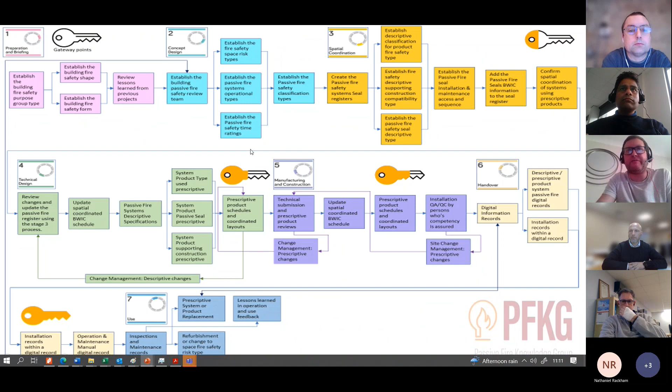BIM being the key part of getting the asset stuff correct in relation to how this flow works. So don't pay too much attention to it - it's all about how you establish the shape and form of the building, how systems work in risk categories in relation to space, ratings, time, how they operate, and how you get to the point where you've got a register of all the different seal types in the building.

Sorry, Paul, just to jump in there, just for my knowledge, when you refer to the passive fire systems, so these are essentially things which don't have power or anything to them. These are just sort of fire stops and seals and things like that. Yeah, I'll get onto it because there's active systems which are a bit more dynamic. You've got static passive fire, but then also you've got transient systems, right?

So we broke it into 3 categories. You'll see it in a minute when I go through it all. But this covers all of it. So passive fire knowledge, because even if you take a fire door, it's still a passive system, but you can walk through it. So it's transient. Smoke extract is like dynamic, but it's passive in its first principle because it compartments, but it can open to extract. So we looked at it in a slightly different way to bring it into language, make it easier.

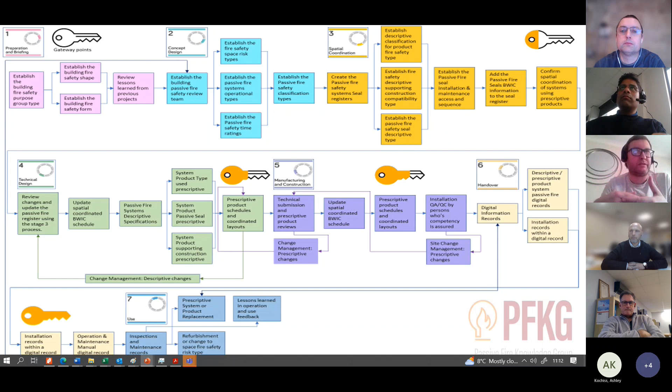So we kind of went for, don't worry too much about all this at the moment, because I think in time we'll get this issued out for a bit more, but there's a RACI that sits behind this as well. So when you talk about getting clients to understand who should do what, we're trying to tackle it as well, but at a very high level rather than going into the detail. So the biggest thing was breaking down.

The next part of it was when you take, whether it's a fire door, a damper, whether it's a pipe seal, because these things are all different, whether it's a flue, a busbar, the only way to understand how these things work in practice is to look at the fire risk type of the building, the space risk. And whether those systems are, as I said earlier, a fire door is transient because you can walk through it. And they can be dual swing, single swing, and they can have glass panels in them, whatever. All different sized doors.

Fire dampers are generally static. They shut. Smoke control is dynamic because it can open to extract. So we try to bring it into some different language about the operational types. Once you know that, you've got to assign that to that. Then you've got to look at how you get to the classification of those products, because this classification here is for a fire damper. But there's other classification information or important information that sits behind it.

Hence why the BIM's so important, because then you've got the supporting construction side of it, which we all know has been half the battle, whether it's symmetrical, asymmetrical, or it's rigid, whatever type of wall construction has been used, whether it's standard or other. So this side of it, then you've also got the installation and maintenance type. Unless you consider all of those parts before you get to this point here in gateway one, there's a good chance that build or something's going to be wrong.

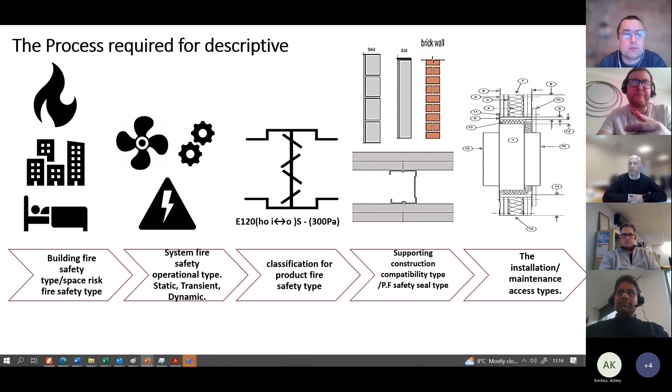So I think, as you said earlier yourself, it's about how we get clients back to a very diagrammatic view where you can say, if you don't follow something like this, this is what the output is going to be to your project. So one of the things we said previously externally is that fire engineers generally, don't get me wrong, don't shoot me down, should know the space risk and really should know the building type. And that should be the fire strategies. They're really the knowledge holders of that part. Especially the space risk, they should be the knowledge holders.

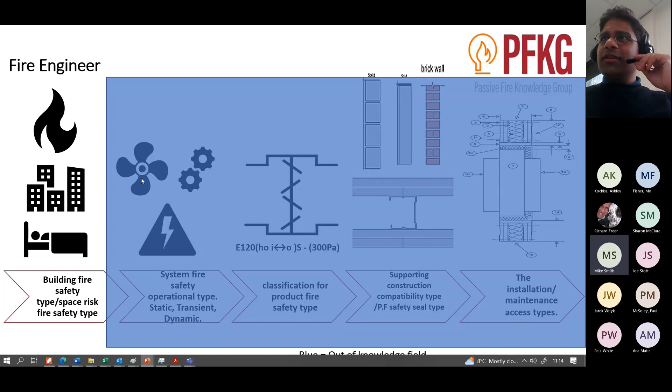Is everyone else? I'm just struggling to hear a little bit. Should we turn our videos off just in case, if that's okay? No, I don't think it's you, Paul. It might just be a bandwidth issue. So I'll turn my video off. Maybe if everyone does that, just to see if that works. Anna. Hi everyone. Apologies for being slightly late. That's fine. Paul's just doing a presentation on the work they've been doing. We're just going to turn cameras off to reduce bandwidth, if that's okay. Yeah. Thank you. Try that, Paul. See if that works. Rowan, can everyone go on mute, please?

Start speaking, Paul. See if that works. Can you hear me now? Yeah, that's good. Perfect. So I think it's just my lead. You can still hear me, yeah? I can, yeah. Perfect.

So just for Anna's benefit, externally it's called the Passive Fire Knowledge Group. I've been looking after the process. Just really quickly for you, Anna, we try to get RIBA aligned in such a way where you've got some very big methods of going through passive fire knowledge cradle to grave. So we were just talking about shape and form of building, the risk category of space, your system operational types, and how you get to the point where you really need to have a classification register before you get to Gateway One, because otherwise you can't tell whether things are going to fit in the building. And there's a case example at the back of this about

what the effect of not doing it is. If I just move forward quickly back to where we were, these are the five things we were looking at: building safety type, space risk type, the operational side of the system, because fire doors are transient, dampers are static, smoke control's dynamic, same as sprinklers because they're performing a function. Every product's got different classifications by DoPs, but there's other information that sits behind this. To get these parts right, you need to understand the blade type of the damper and other things. And you've also got wall types, which is your standard supporting, your flexibles and your brick and your block, or your non-standard, your asymmetricals.

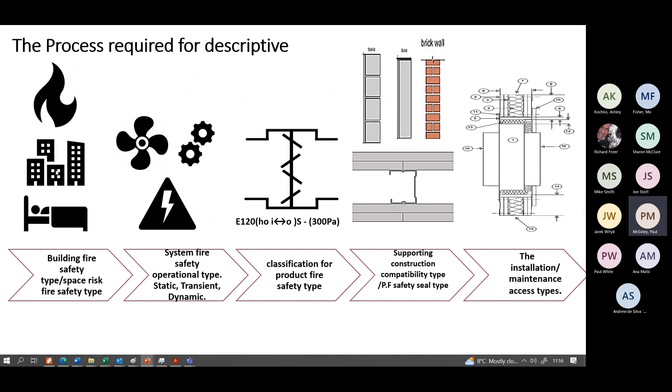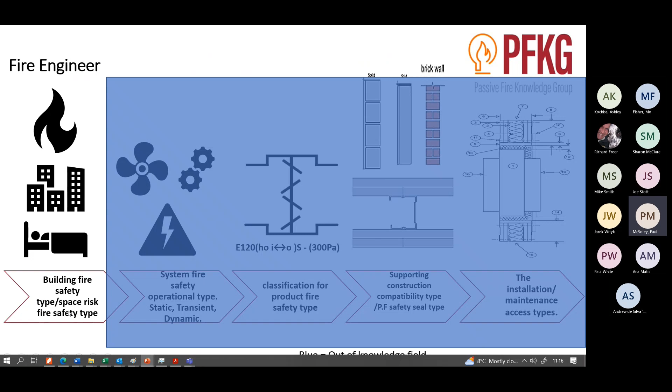Then you've got the access type of installation and maintenance of products and how you get them installed, which is obviously a key thing to get done before you get out of the planning stage. Not actually fully drawn, but have the considerations for different products. So what we're saying here is that fire engineers are really the knowledge holder for the safety type of the building and generally the space. Some spaces are more complex and they might need help, but generally they should know it.

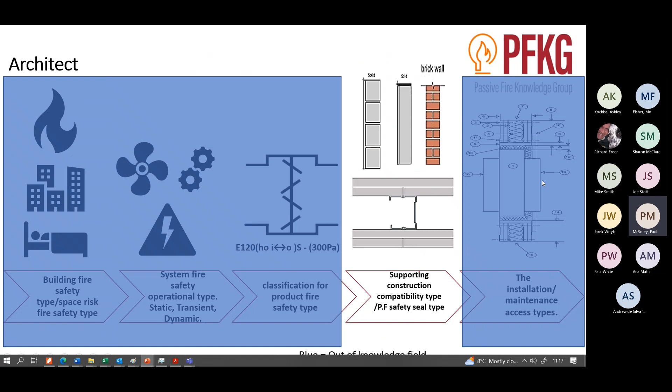You look at architecture, and don't shoot me down here, but most architects will understand the difference between symmetrical and asymmetrical and brick and block work walls. So they know that part. They're not fire engineers. They don't necessarily understand how smoke control systems work and classification of the products. They don't always understand how you install things because it's product specific. Same as a fire engineer doesn't know all of that. Building services consultants should generally know how things should function, but they don't always, because even with fire dampers and smoke control, just to make Paul White laugh, they don't always understand how those products work either. So they should be the knowledge holder, but not necessarily know all of it. They certainly don't know this part because they're not fire engineers.

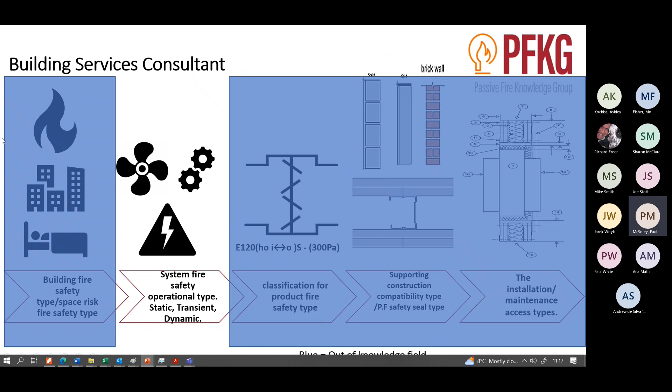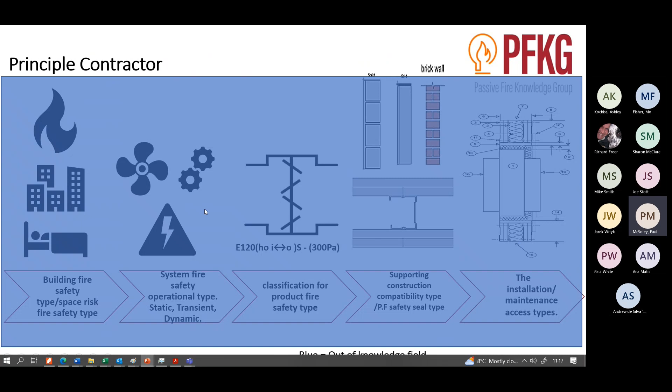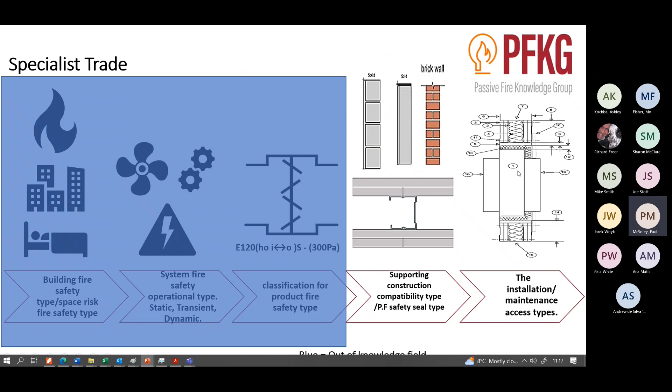When you look at principal contractors, just to really make you laugh, we are passing all the risk down the line. So we are knowledge holders of generally none of it. That's what generally seems to happen. Specialist trades, so someone that does drywall should understand drywall. Someone that supplies dampers should understand how you install and access a damper. Sometimes they do, sometimes they don't, depending on the entity supplying it. And product suppliers will understand how their products are classified, how the walls are classified. But again, they're not fire engineers. So the point of all this was that it's not actually one duty holder that knows all of it. And this is why we're getting into a bit of a pickle.

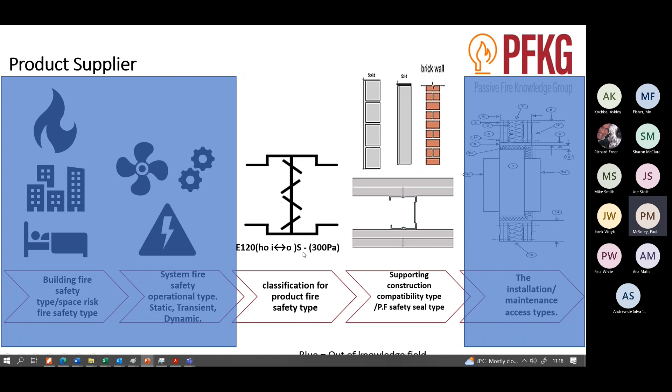As you said yourself, Andrew, around procurement, it's quite key that if you're going to procure a product, you can't just go CDP and assume the supplier of that product is going to know how to do all of this, because they're not. That's where it's going a bit wrong. So we went, how do you break it out into an easier way of portraying it? So forget that one because that's an old slide.

The big thing is that the key denominator is the wall. I'm going to do a case example on a damper because it's the one we've spent the most effort on, to be quite frank with you, though we're doing a bit of work on doors as well now. If you take a damper in consideration to a wall type, anything else that's in that wall must be considered at the same time as the damper, because it affects the thickness and the type of the wall and the installation access to get that wall type right. So you can't set a wall unless you've set all of this in comparison to that wall.

So when you look at procurement, we're seeing drywall packages getting on board after maybe building services trades have done their coordination, and doors are getting procured before security packages are known. And it's all just a bit of a mess because, with doors, if you don't know what type of lock you're putting in the door, it's very hard to do a fire door with a mortise lock in it if you didn't know you needed a mortise lock in the first place. This is what we're kind of seeing.

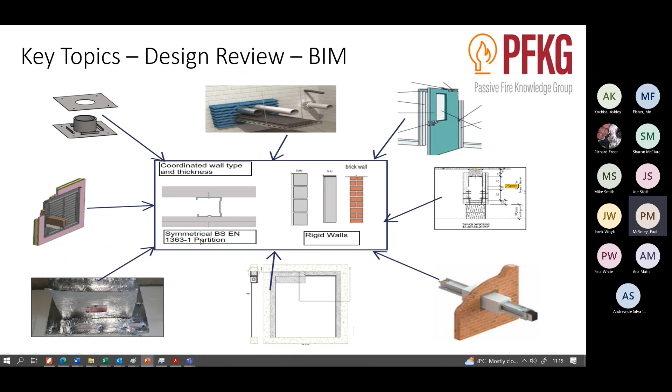So it's all about getting this system approach aligned up. I'm going to do a bit of an example around this, so I think it'll make a bit more sense. So in the whole process, when you look at it, there's a passive fire knowledge code of practice and how you get things set out with a RACI, which I will share once we've got this stuff into a better order, because we're going to get people's opinions on it. How you then do workbooks, which is what I'm going to show you next,

and the bit I need some help from George on is about getting this asset information right, because I don't know if you remember seeing these before. I did portray these in the Excel spreadsheets. They're enormous things and it's quite hard to get simplified. So this is all about simplifying it as well. So if I just quickly come down, I'm going to do an example on a fire damper. This is going to be the test of time. Now, hopefully I don't get heckled too much on how you select one of these things in, say, a protected space.

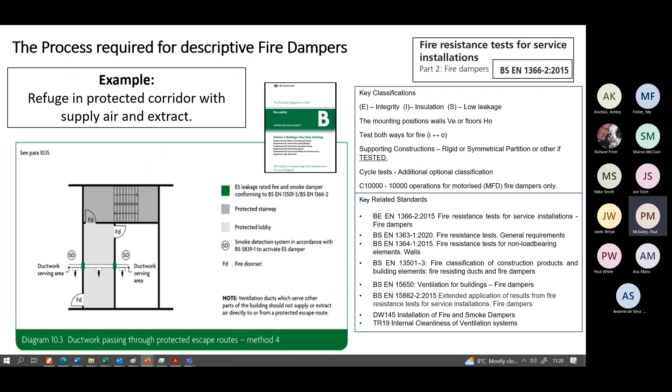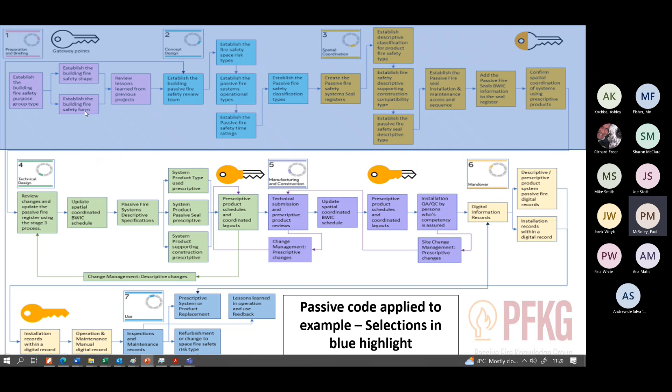So originally, this is the first part of this whole passive fire process that I'm going to use on it. I'm not going to go into this part because this is all about change as well. I'm going to consider that damper as part of the wall system with everything else as well. So if I just come down quickly, I don't know if everyone's seen this before, but I went through and plotted out, and Paul's had a look at this as well.

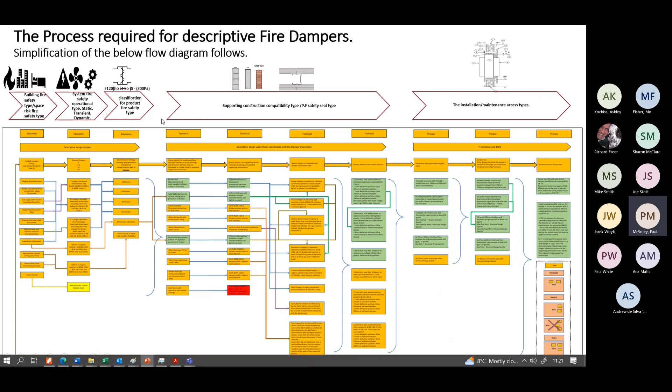It's how you select a fire damper based upon the space risk type, its functionality, the wall type, and how you look at access and maintenance. For us as engineers, it's not too hard to follow, but it's quite difficult for people that really don't understand the inherency of the engineering. So we said, this is where these come into it, because these are a representation of basically these channelings. So I'm going to try and make this look a bit simpler. So I'm going to start with this one, but I'm going to relate it back to that RIBA process.

First of all, let's look at a fire damper from the fire space risk and the building type risk. I'm going to look at it based upon something like a disabled refuge in a protected corridor with supply and extract air. So I want to establish the shape and form. That will come from previous projects. You should look at lessons learned that you've had on these kind of examples, not as an individual architect or building services engineer, but as a team. Because everyone really needs to get, and this is where it's all gone wrong, a bit of a collaboration on doing passive fire team reviews. Then we can look at the next part of it.

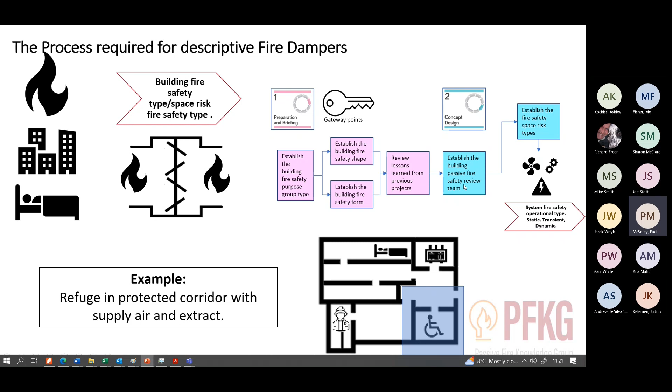So what does this look like in practice? Look at all your different purpose groups. You've got 1As, which are your multi-flat developments, your dwelling houses, your duplexes, your prisons, your group 2As, your student blocks or hotels, your 2B offices. So I put all the purpose groups across the top, then went, well, someone's got to look at the shape and form, and you've got to look at the space risks. This isn't all the space risks, but just to give some examples.

So if you looked at, say, a disabled refuge inside a protected space, not in a firefighting shaft per se, but in a protected corridor somewhere, and your building's less than 900 square meters, that drives your floor plates for firefighting shafts and things. Your height's this. It's a Group 2 building. So say it's a student block we're looking at. It's a refuge. It's got a fire and a smoke risk.

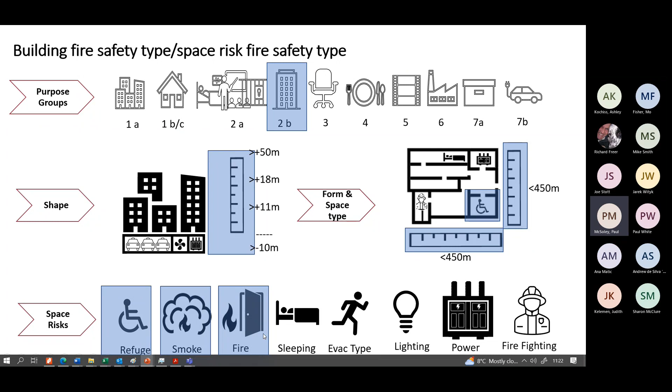That should be the thinking behind the fire engineering to get you to that point. Then you want to look at how this thing works in relation to its operational type. So you go, well, let's look at whatever's in there, how it's going to operate from a fire damper point of view and what the ratings and times are before we get onto the classification.

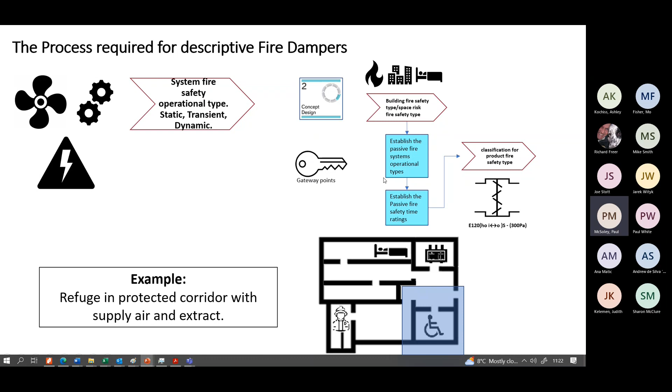So I said, well, this is probably the best way to portray it, because this is a protected lobby or corridor. I think everyone agrees with that, because this is what you've got in there. It's got ventilation, so it's got a fire risk, a smoke risk. You can have a rating between 30 to 120 minutes, depending on where it is. But because it's a protected space, it's got to be activated automatically to the closed position by fire alarm activation. That's method 4 in building regulations for that type of damper.

But the bit that gets kind of missed out is that system, and depending on the product you're buying, it could be an opposed blade damper, it could be a parallel damper, it could be a single blade damper. It can't be a curtain damper, because that can't be automatically driven. It's got one of these three sort of damper types, and it's obviously got a power and fire alarm supply. So what does it look like in practice? That's kind of what I'd be choosing. I want something like that to make it work.

It's all about process that should go on, but it's not going on, because I think we've kind of lost the collaboration in the industry to get it right, because of how procurement's driven maybe by clients. No disrespect to clients. It's like, we're going to do this CDP later on, but someone that does CDP can't be a fire engineer, an architect, everything at once. It's got to be done at a level before you prescribe it for them to describe the product that you're getting.

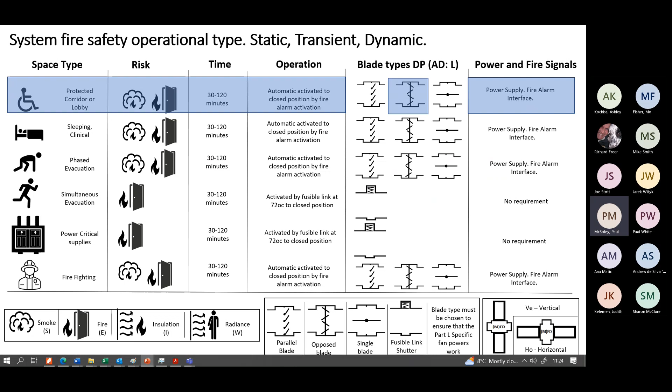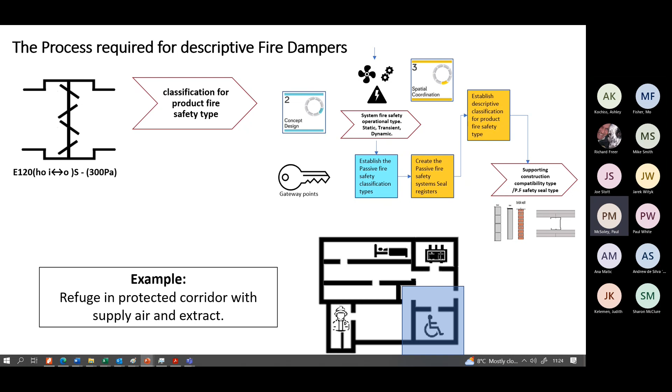So if I come on to the classification of how these things look. You then go into the next bit about getting it classified. I want to establish all the classification types and I need to do a seal register as well for all of this stuff. That'd be for all products. So we're going to the next one. It's the same chart again, but I've just changed some language and added some more stuff into it.

If you think about it, it's protected corridor again. So it's ES. So I've got one of those little diagrams, just put the figure in. So it's now an ES damper. So it's going to be between 30 and 120 minutes. It's ADB method 4, which has to shut automatically on a fire alarm activation because of the smoke risk. I've still chosen that blade type.

Well, these are really important, because these kind of blades might give you a 70% free area. That might give you 50 or 60% free area. That might give you 50% free area. So if you've based your airflow engineering on a fusible link, your duct's going to be 50% too small. And we see this a lot, because no one considers that the blade type's got to be defined as one of the parameters before you go into CDP, so you get your Part L calculations right for fan power.

All dampers will be inside to out tested. This one's on a wall, so I'm going to go for a vertical installation. There's a little diagram down there to tell you what it actually is. That's a VE damper for the wall. And the cycling in dampers can be up to C10,000. I think that's right, Paul, isn't it? Dampers you can still do up to C10,000. You corrected me previously on that, I think.

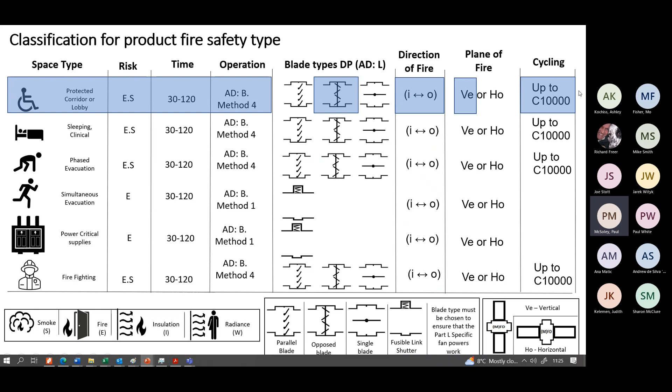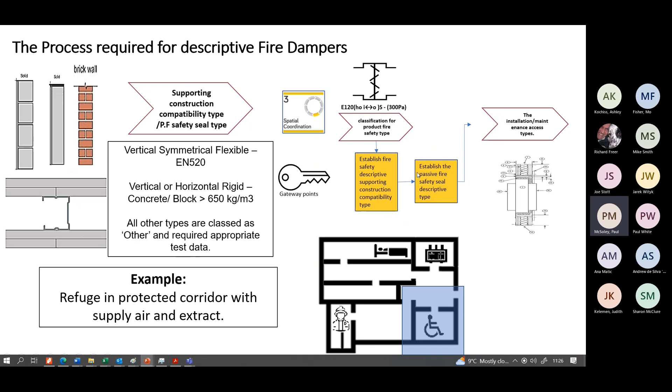So then you've got to look at this in comparison, because you've set out what that product basically is, but you need to set it out in comparison to the type of wall you're looking at. So if I'm putting it in a blockwork or a drywall, what am I looking at? Well, you've got two types of supporting constructions. We've all been through this. You've got rigid block, or you've got symmetrical EN 520 boards. So anything above that is classed as other. So let's look at how this looks in practice, because you want to establish how the construction is compatible with it. So these are all the different types of damper blades that exist.

Anything else above this is classed as other. You need to make sure it's been tested with it. But then the thickness, you just need to check the DOP of the manufacturer, the minimum thickness that's been used in their test to set that into the wall. So it might be 122 mil, it might be 100 mil, but you need to check with the manufacturer what that is. It's giving you a method of going through it, but you know the seal type on these, the passive seal types, are EN 520 and mineral wool.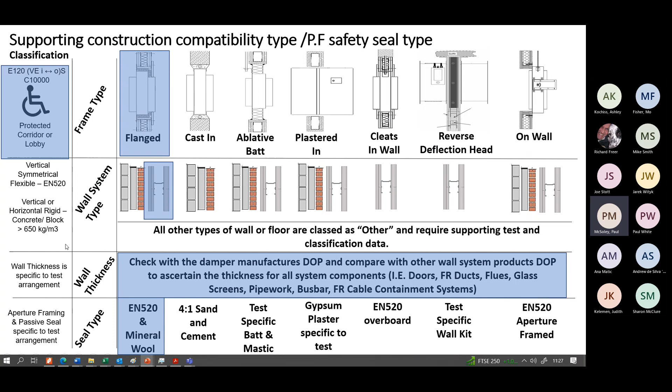Then you've got to look at how you do the installation, the access of it, because this is where we're seeing it going horribly wrong, is that you need to allow the space. And this is how I kind of worked it out. So I know what that is. I know the blade, I know the damper type. I've gone for that type of blades. I know what your pressure drop is. I know it's VE in the wall. I know it's symmetrical, but I still need to consider it with all the other components that go into the wall, because that's just one component in isolation.

Not forgetting doors are complex, because you might have Part M requirements. It might be powered, might have lower pull forces. You might have security on there. It could be Z&L brackets at the top. It could be a mortise lock. That has to be compatible with the wall thickness as well and the wall types. All these things have got to be checked as a system for the wall that they go in.

So if you've got one wall on an office floor and it's got doors, glazing in it, it's got flues in it, fire rated ducts and dampers, you've got to run the same exercise for all of these, all the components that go into it, because you've got to get that to suit all of these, not these to suit that, because they'll all be different. Then you've got your seal type, then you've got your access requirements.

So any seal that you've got for a damper, a duct, anything like that, you still need access both sides, because all seals need access both sides. You can't do them from one side. It just doesn't exist. So if you've got a symmetrical wall in there, you still need to get in to fix the wall. If you've got a shaft wall, and this is tested in shaft wall, the seal still needs access both sides. And if you're doing that seal as a passive fire company or someone that's doing the damper, you need 500 to 600 mil of space. So you can't just ignore that, unfortunately.

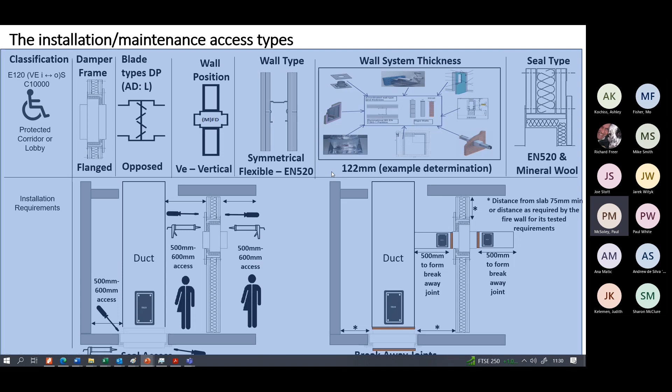But again, don't forget the wall itself has still got its own requirement, which has got to be compatible with these as well. So the minimum distance for this from the top might be 75 mil in the test standard, so they can test things properly. But the wall, if it's got a 25 mil deflection head, might need 250 mil of drywall build up before you can put the damper into it. And that's the reality of how you do it. So you can kind of see it all there visually.

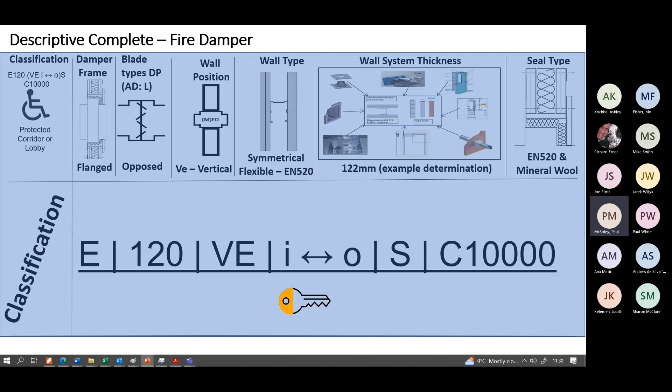So if you look at it all, that's how you got to that classification number at the bottom, by going through that process. This is how we've tried to portray it, and we'll present this a bit more as time goes on. Once you've done that, the next step is to get the asset information right, because all of these different things need to be recorded in the asset. Some things are geometry, some are PDF held, like test results or the O&M manual for the product. That's the next bit I've got to get done with Jules.

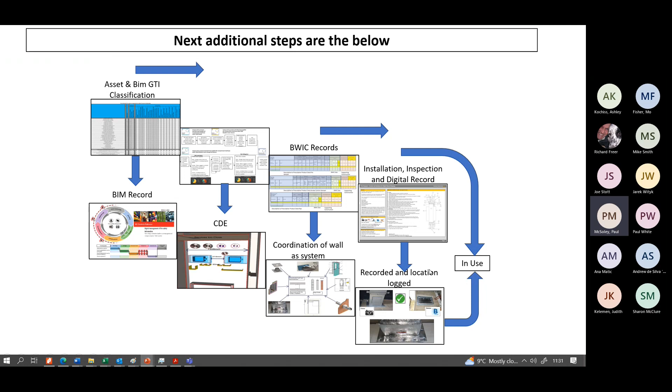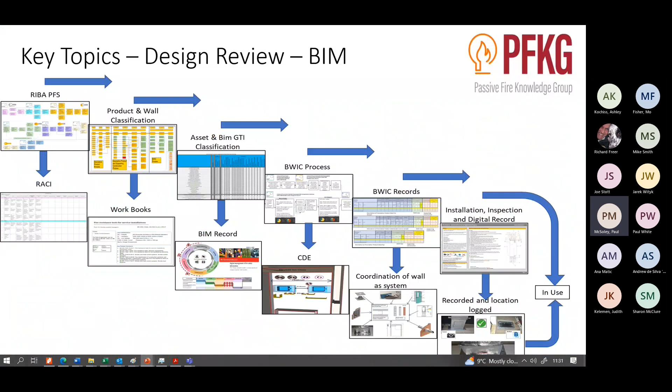Then I've got a process of builders work. There's a way of doing your different builders work schedules. The big thing is you cannot put passive fire seals on one schedule. You need to break them out by subject matter, otherwise you get yourself into a pickle, and the common denominator has got to be the wall system. And you've got your digital record and inspections. Lots of other things sit behind this, but to put it into more of a flow around a passive fire knowledge process, that's what it looks like in practice.

I'm going to switch that back off and revert to the screen and let the questioning begin.

Did that make sense, everyone? Or has everyone been a bit dumb? Everyone's a bit like, whoa.

No, I think it was a whirlwind, but it's clearly done a huge amount of work on that. And the diagrammatic element, for a visual kind of person like myself, really helps make it a bit easier to understand.

Something quite complicated. I guess the question I'd have at the moment from an architectural perspective, because we're going through trying to generate our content library for architectural wall types and door types, is in order to reduce the number of glossaries, or the number of things in a glossary, for example.

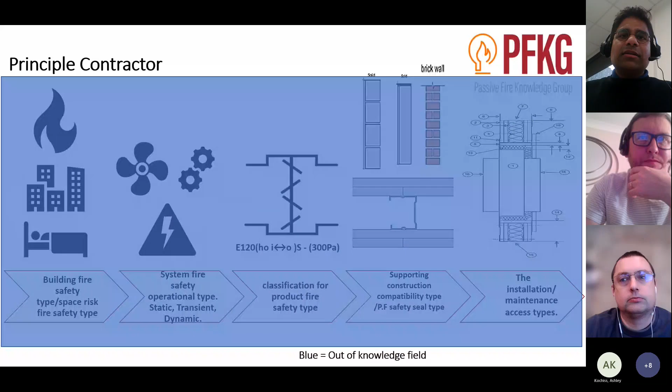What I can think immediately here is that coordination, a more detailed review between the M&E services, for example the fire consultant and architectural layouts, because typically we do the layouts and then the M&E overlay their design onto the scheme. But I'm 100% sure no M&E has ever looked through our wall glossaries and gone, actually, hold on a minute, we've looked at the wall type you're proposing between the party walls or shaft, and our proposed ductwork is not going to work in that. We don't think it's going to work.

Now I'd like to understand what is currently happening in practice, because I don't know if this level of scrutinizing actually happens, or maybe it does, I've just not been lucky enough to witness it. And how is it a case of being more onerous with the coordination requirement, to say, actually, M&E fire consultants, you're going to have to check the wall build-ups as well, that we propose to meet the fire and acoustics we may need, against the review you've done in terms of the passive fire. Is that a fair question?

Yeah, I think what I'm seeing from various different things, if you imagine this, just take this one example. We've had this on a job where we've had a riser with ventilation duct going all the way up. The outturn onto the floor, the distance between that wall and that duct is 90 millimeters. And in 90 millimeters of space, you can put a shaft wall there, because this is about reversion to type. No disrespect to anyone, but if you've got a shaft, the first thing the human brain thinks is, I'm going to put a shaft wall in because it's a shaft, because I'm safe, because I'm only building it from one side.

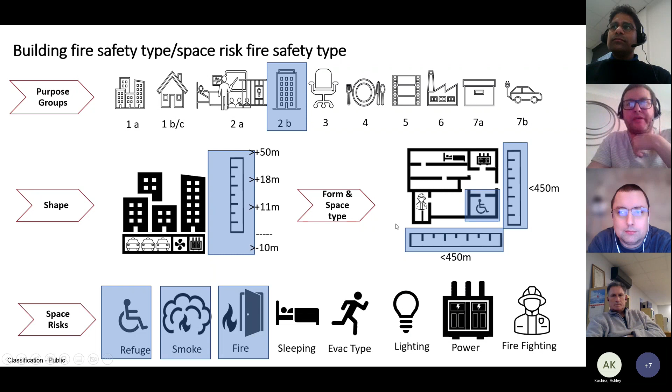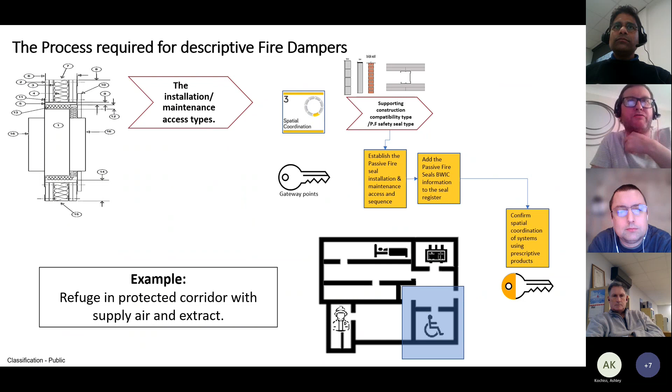Yeah, there's limitations on bespoke. I'm doing the same thing at the moment for this on steel beams, because you can't put steels in compartment lines and put products through them - there's no method of doing it. I'm trying to get that method of how you get yourself out of that dodge when it all goes wrong into an order in the same sort of shape as this.

But I think to have that in that order - is that Richard? Is it? Sorry, no, it's me, I was just going to say something. Can you hear me? I could hear some background noise. I think it was Richard. Yeah, you're going, Paul, go on mate.

I think that's the whole point, and I think you've definitely shown it very well, Paul. The key point is that if you close everything down, there's not going to be a solution, however much you want one. I think that's the situation we're in now, because somebody just solved it in the past and put it all in, and now they can't do that because they can't generate the evidence to say that it's all right. And you won't get assessments done either.

They just won't do them because there's not enough data to do it. I mean, if you look at all of this, it's just dampers. Just for your benefit, Paul, all the stuff that I do, I send to Paul for verification as well. This isn't bringing you into the blame game, Paul - I rely on you for a lot of your skilled knowledge on these subjects as well, to make sure you're keeping me honest. So I do try to get as many people to look at these things as I can.

And all this stuff will come out. I've got another meeting in the PFKG end of this month where we're going to try and get this fully ratified, so we're all aligned. Then we're going to bring other people into it, because the bit I really need help on is that if you go to a manufacturer - manufacturers need to come on board with this - they give you a Revit file which has got a load of information.

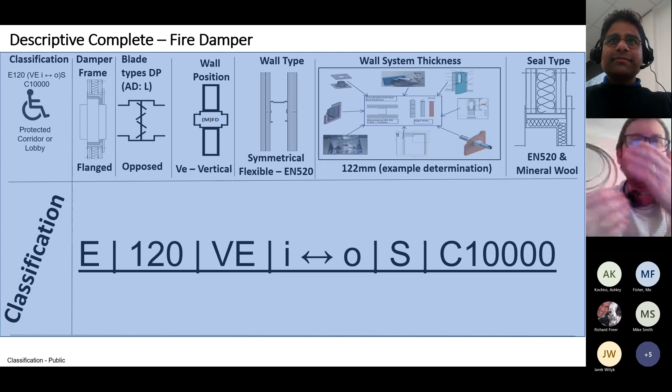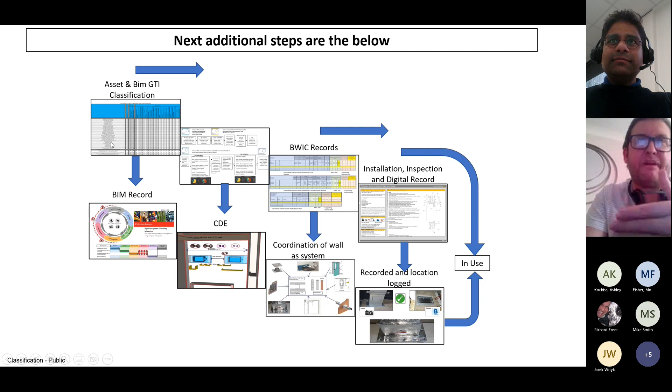If you imagine, if we get the manufacturers fully on board as well, you'll end up with that information that's there, which is all above in a Revit file, and then in a tick sheet at the front, which will basically make you go through that process of selection in this order. And that's going to help drive it as well. That's where the BIM part's quite important, because it's got to be held in Revit, a lot of this as well, and that's all for golden thread and for changing later on.

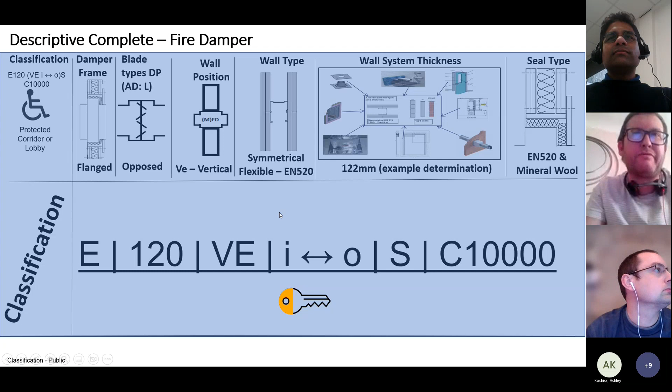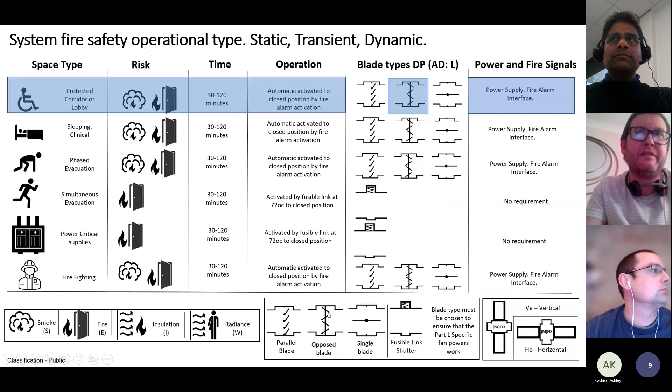Because this is essentially, when you think about it, if you wanted to do golden thread for a fire damper in one location in the building, this is all it is, isn't it? You've gone through the whole process of type, space, risk, everything, to get to that point of selecting the appropriate product for the appropriate circumstance of where you want to use it. That's what we try to do and make it diagrammatic, essentially.

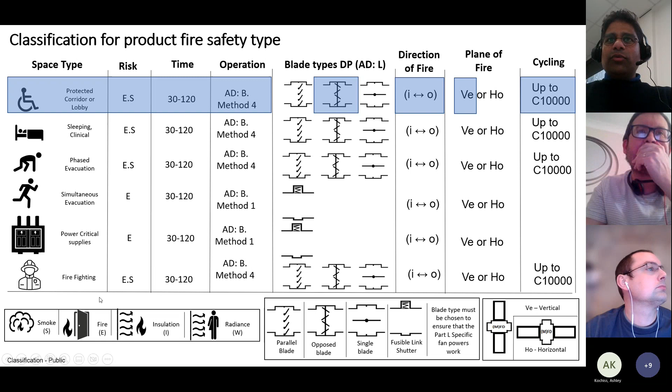That's great. Well, one of the things that may help Paul is, as I said, from an architectural point of view, we're going through this sort of wall type filtering process for DMA-led projects, trying to minimize the number of types that we have of walls, whether it's dry lining - at the moment is what we're focusing on.

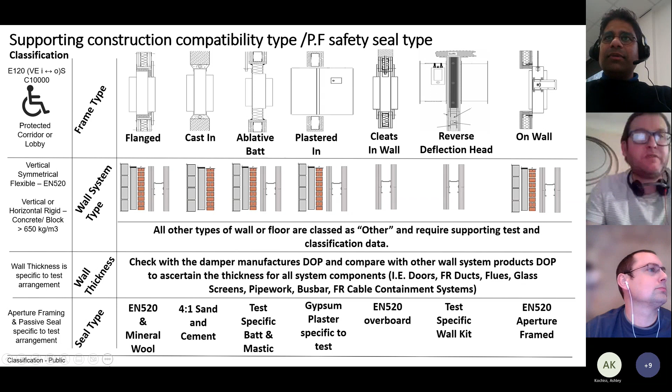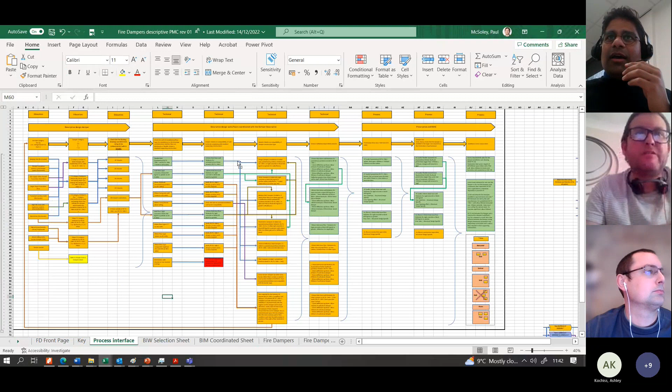Ideally it'll be dry lining or RC, some block work in unusual scenarios, like in a plant room. So once you've looked at this, I could share what our team are doing - here's our typical glossary of wall types which achieve the acoustic and fire requirements.

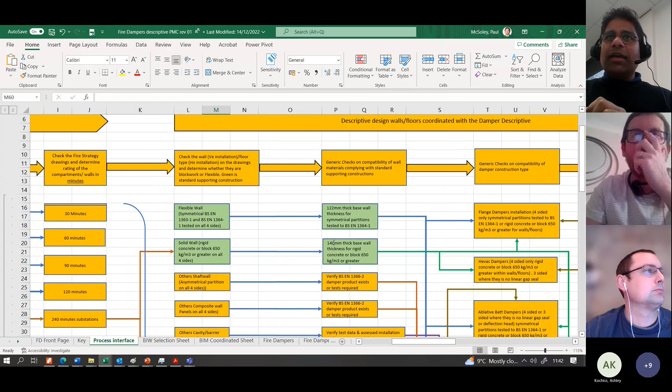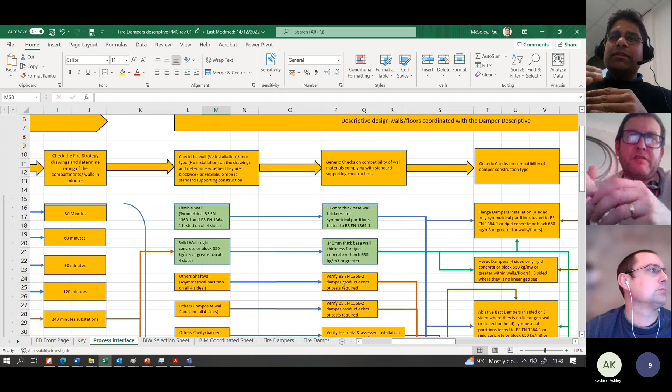Not a huge amount, to be honest, in a flat - I think there's like 3 wall types, with variations based on board type and finish. It would be useful to say the wall type thicknesses we're getting are here, and how does that align to the testing? Because you've got 122, 140mm - they're quite thick walls relatively speaking internally. I'm happy to share that when the time is right, because we're doing it at the moment. So if your wall types don't match up with the certified ones...

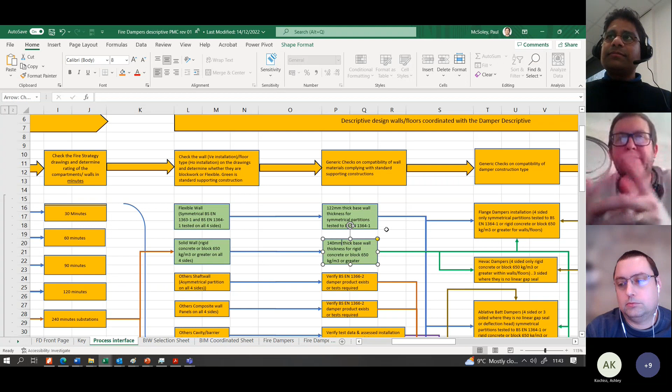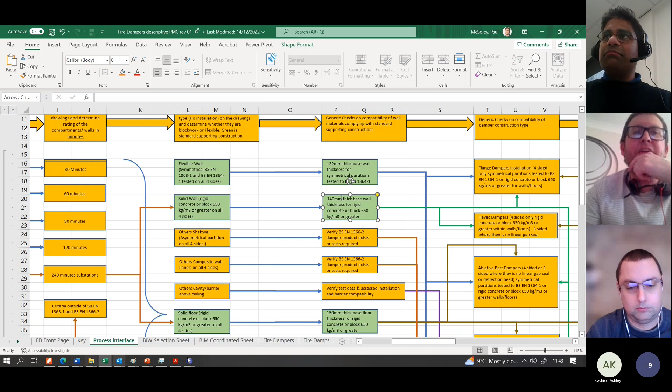These Excels are available at the moment anyway, they've been sent out - if you need, I'll send them back out to you, no drama at all. But I find it easy to share our glossary, and then you can say, actually hold on, most of the test data is done on walls which are thicker. So there's some inherent misalignment between, say, BG Whitebook or Knauf and the testing done on dampers, for example.

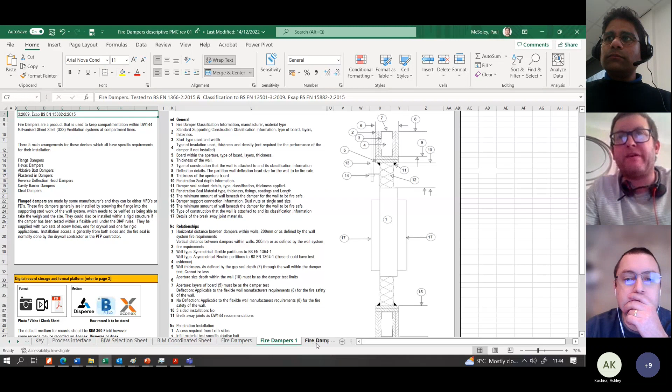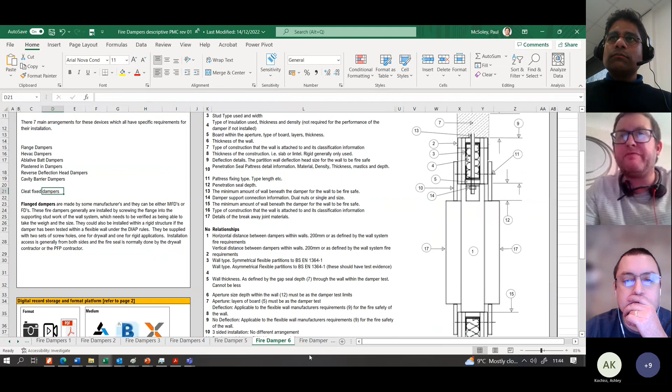Some of the Mandik and Trox kit on the market doesn't have any aperture framing because you're filling it with gypsum plaster - these are a kit that's built and formed into the wall, specific to the manufacturer. Sand, cement, cavity systems, cleats built into the wall - all of these have variances. So you have to compare that as a system approach with the whole wall, and how many holes can you have in the wall before it can't house any more.

The other issue is that you've got to get your coordination right if you're building the wall, because if you buy that one, you have to have the damper installed before the wall goes up, and if you buy the other one, you've got to have the wall there before you put the damper in. So you've got to be looking at your site coordination quite clearly.

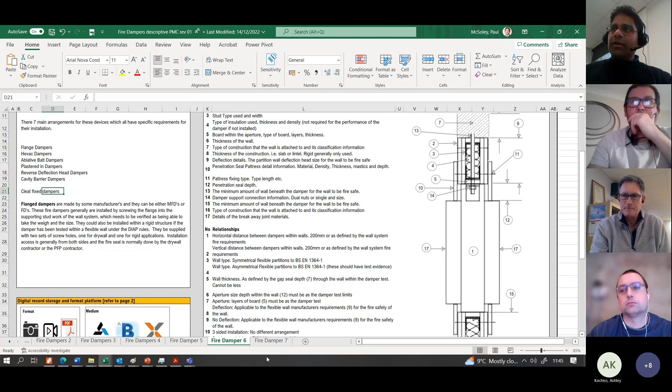Interesting. I've just seen a couple of other things - I think Sharon, you made a comment, and Joe, you sent a link. If you want to just add to that. Yeah, let me get off this screen quickly - hold on.

It just rang a bell in terms of you saying you're developing your library of wall types. We've been going through exactly the same exercise, driven by sustainability more than anything, and making sure they're tested products. We haven't quite managed to boil it down to 3 wall types though - I'm impressed by that. We've actually, just internal apartments - not when you take all the party walls and everything else, it just explodes.

Yeah, in terms of purely dealing with fire and acoustics, but then when you put the wall types or board types in, it messes things up a bit. As you're trying to make things simple, things always want to get more complicated, don't they? Exactly. So the link I just put in the chat was to Knauf's Revit plugin - something I haven't used, I haven't played with it, but I saw it when developing our own content.

But I don't know if that actually asks the same kind of questions that we've been discussing today. I suspect it doesn't. But it's interesting that it's developed, because it's getting so complicated, isn't it? That this has to be solved by programming and databases rather than us mere mortals, I think.

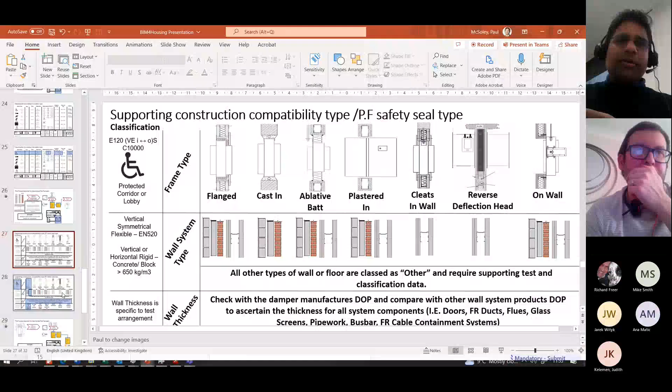I haven't really seen that happen on projects I've worked on, but in an ideal world that would be the best way, so that the maintenance and installation elements are picked up in the design and fed back to the architectural and structural team. Say we do need more space in this riser because of X, Y and Z, and if it's required, then we'll align. That's what I'm hoping things might change to. Every time I see an M&E subcontractor appoint a consultant early, which is pretty rare, I hope the maintenance and installation is reviewed. But unfortunately, I don't think that's happening.

No, I don't think it is, Ed. I think this is why. I've had two, and to bring this back up again, I don't mind a bit of criticism, because it's healthy to have it. Some people thought I went too far. Some people have said I've got it just about right. Some people have said, well, what about tolerances?

The bottom line is to get to a point where you've got a graphical where, before you go to a manufacturer and ask for a product, that's the minimum. Along with that, you go to them and say, can I have one of these? Yeah, makes sense to me. That's basically what you need. That's why this sends the powerful message that you've gone through all of that.

The only bit is we need to make sure, and this all comes down to relative competence, that fire curtains are a nightmare because of the classification. I'm not having a go at anyone, I'm just looking at what I'm experiencing: a fire curtain isn't REI, and I've seen that 100 times now. It could be E, it could be W, it can be EW, it can be S. It depends on the function it's fulfilling, which affects the product.

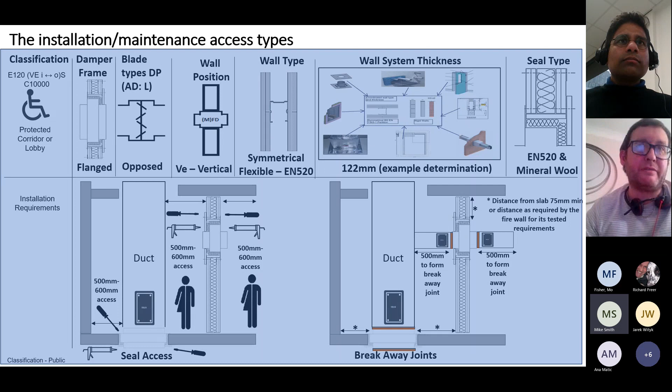This isn't an architectural issue, though. Certain people are putting it on them, and it's not necessarily a building services issue. Whoever's going to take ownership of the contract needs to make sure the pencil's sharp and this stuff's all considered, and you support the design team and the fire engineers to get it right, because there's not one knowledge holder. There are individual ones, and this is why it's good, because you've got a mixture of all those people in these groups.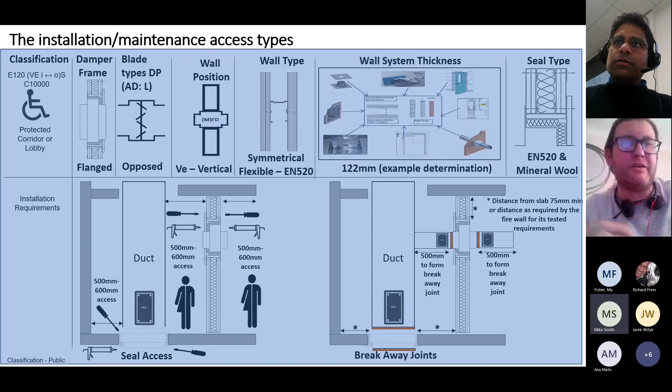Fantastic. I'm going to shut up now. All right, fine. I had a hand up from Sharon. Sorry, Sharon, you had a hand up. Hi. I don't know if you'll be able to hear me because I've got a really bad signal. Welcome to the west coast of Scotland. We can hear you.

I just wanted to say thank you, because this is like a Christmas present for me. I had a conversation yesterday with someone saying they still don't know anything about passive fire protection. They still don't know about service penetrations and sealing them. And that's a fit-out contractor, quite a large organisation, FM.

So listening to this, having an image of a person inside a riser and outside a riser, it feels as if I'm in a conversation with like-minded people for a change, instead of being in a room harping. I'm like the harbinger of doom every time I go onto a building site, because I say you can't do that, and everyone says don't invite her back. So thank you so much. And the sprinkler pipe thing you just mentioned, allegedly the mastic having an issue, as opposed to the bracketry being too tight and the pipe running against the blockwork, etc.

I mean, honestly, I had to intervene just to say the imagery that's been showing, the evidence of how complicated things are, and the way that people, you know, it's almost like people are throwing buildings up and it's actually a science, and this is going to cut through all the bullshit and just make people sit up and think it's not as straightforward. So thank you.

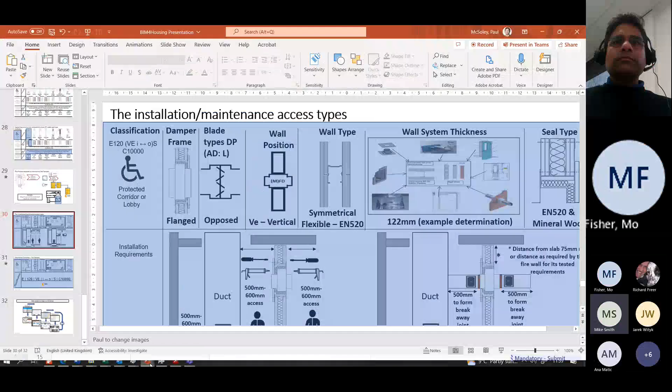And Sharon, that is the only way we could kind of work out how to do it, was actually to put things into imagery purposes. It's a bit like the one I am working on at the moment, the steel beam one. I've got to transfer these images into the same thing, because it's super complex to get it right. And without those images, as you say, you can't cut through the bullshit.

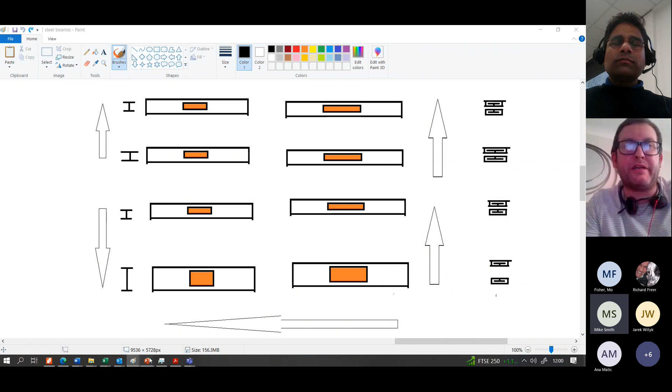If you imagine it from a contractor's perspective, and this is why we brought it out first of all in the contracting group with Martin and the guys there, once you get to that situation where that's 100 mil, that's 50, and there's an AFL involved, agreement for lease, where you can't make the riser bigger, straight away that contractor reverts to type. So does the design team, to be frank, and so does the client, and it becomes hard hats on in the trench, all fighting each other.

But the fact is, someone just needed to bite the bullet and make it big and deal with the contractual consequences. Then it's done. Should be simple, but it's not, because everyone starts fighting about it. So, yeah, thanks a lot, Sharon.

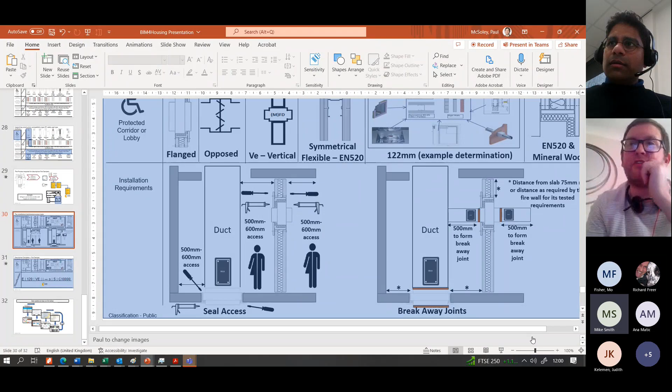Thanks, Sharon. Mike, I know you had put a little comment on the chat as well. I don't know if you want to expand on that, Mike Smith. Yeah, hello. Hope you can all hear me.

Yeah, I mean, again, I think this is a really, really good conversation, and if you took this topic about fire dampers and applied it to any other element within the building, it's a very, very similar conversation. I think the key message with this is we always come across people who have wonderful skill sets and knowledge about a specific element, and it's about having those right and open conversations at the right time.

I'm always a little bit nervous of manufacturer-led design tools, like the NAF tool and things like that. I think they serve a purpose, but I always feel that there's a step ahead of that, which is more generic information about buildings and projects, and that always comes from much better and open collaboration in the early stages of projects. So I echo many of Paul's thoughts, and thanks.

That's been really good. And I think the thing when we're designing is just building in those kind of rules of thumb a bit more, that design book that we've spoken about before, all the zoning discussions, and making zoning not just "oh, it's always 300, so we'll do it 300." It's not just 300, it's 300 or 350 because of X, Y, and Z decisions, or actually this flowchart approach that you've taken to get to a zonal decision.

They may not be 100% right, but there's actually a logic and, as I said, a thread to how you got to that zone. So if you apply that vertically, horizontally, to ceilings, to floor build-ups, etc., then that's going to help minimize issues down the line. I'm sure you can make it bespoke and slim it, but always start with the real tolerance on each side first, rather than squeezing ourselves first and then really struggling later on.